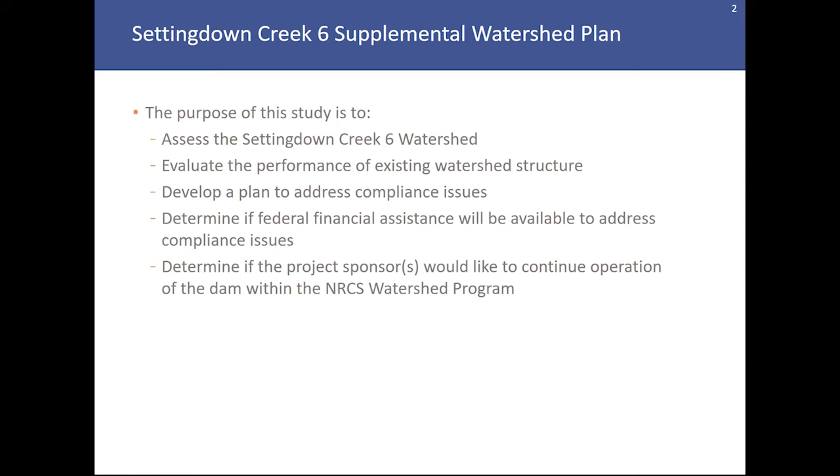The purpose of the planning study is to assess the Settingdown Creek 6 watershed, evaluate the performance of the existing watershed structure, develop a plan to address compliance issues, determine if federal financial assistance will be available to address those compliance issues, and to determine if the project sponsors would like to continue operation of the dam within the NRCS watershed program.

As part of the planning study, public participation is of great importance. The objective of the public participation plan is to inform the public and watershed stakeholders of the planning effort. A series of public meetings have been held for Settingdown 6.

The first and second public meetings included a brief history of the NRCS watershed program, a brief history of dam safety, considerations for dam design, operation, and maintenance, an overview of the Settingdown Creek watershed and the specific dams that have been included in the planning study, and also an opportunity for the public and other stakeholders to submit questions and comments regarding scoping topics and the identification of project opportunities and concerns. The second public meeting included a list of potential rehabilitation alternatives for the dam.

The first public meeting was posted to Schnabel's YouTube channel from August 7th to August 17th, 2020, and the second public meeting was posted to Schnabel's YouTube channel from December 18th, 2020 until January 4th, 2021. Please note that the first and second public meeting presentations for Settingdown 6 have been reposted to Schnabel's YouTube channel for those who were unable to view the presentations during the allotted date ranges listed above, in the event that they would like to review those presentations with this third presentation.

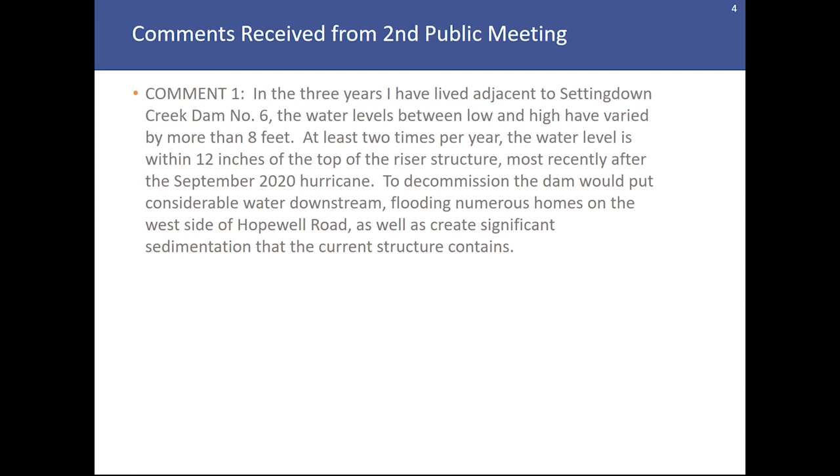After the second public meeting, a series of comments were received. We'll take this time during this presentation to present those comments that were received. Comment 1. In the 3 years I have lived adjacent to Settingdown Creek Dam Number 6, the water levels between low and high have varied by more than 8 feet. At least 2 times per year, the water level is within 12 inches of the top of the riser structure, most recently after the September 2020 hurricane. To decommission the dam would put considerable water downstream, flooding numerous homes on the west side of Hopewell Road, as well as create significant sedimentation that the current structure contains.

Comment 2. Settingdown Creek Dam Number 6 is home to fish, egret, herons, ducks, geese, and a multitude of additional aquatic wildlife. It is also adjacent to wetlands that further protect the wildlife from human intrusion. Dam decommissioning would eliminate this wildlife, in addition to causing flooding across Settingdown Creek Road.

Comment 3. The no action option is the least expensive and least wildlife intrusive option. The existing dam structure is functioning properly for flood control and sedimentation collection. The dam decommission option creates more flooding and sedimentation issues downstream while having the greatest impact on wildlife. It may solve 500-year flood concerns with the dam, but creates new issues that would require home destruction and removal to remediate human flood threat downstream caused by the dam removal.

Dam decommissioning negatively affects both wildlife and humans and should not be considered an option. Both of the spillway options are possible, but would take years to accomplish and be expensive. As a landowner of a portion of the lake, I would ask that the property owners be considered for the reduction of their home/land values in any option chosen.

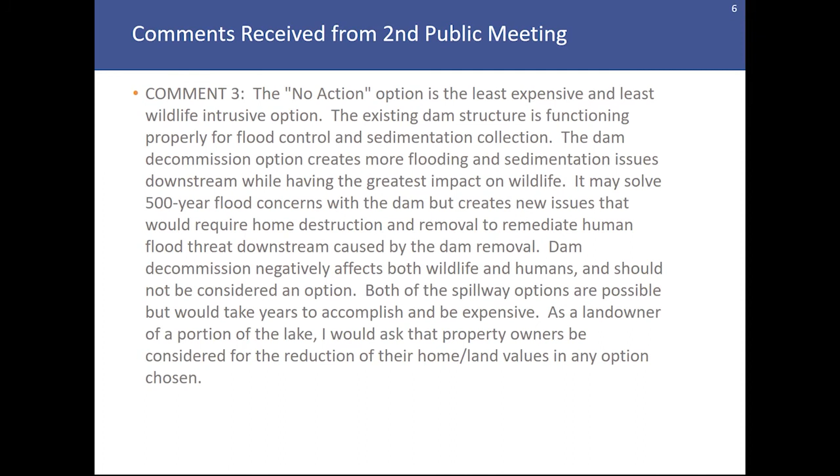The third public meeting presentation will discuss the following topics. A review of the Settingdown Creek watershed and the specific dams that are included in the planning study. A review of the existing conditions associated with Settingdown 6, and the presentation of the shortlisted alternatives to address concerns with the dam. These will include a no action alternative, which would be a future without federal investment alternative, meaning that the project sponsor would be responsible for funds to address concerns or issues with the dam. There would be no federal funding with that option.

A future with federal investment alternative will be discussed, as well as a decommissioning option that is required as part of the planning process to be considered. The locally preferred alternative, based on conversations with the project sponsors and NRCS, will be presented, and there will be an opportunity to submit questions and comments at the end of the presentation.

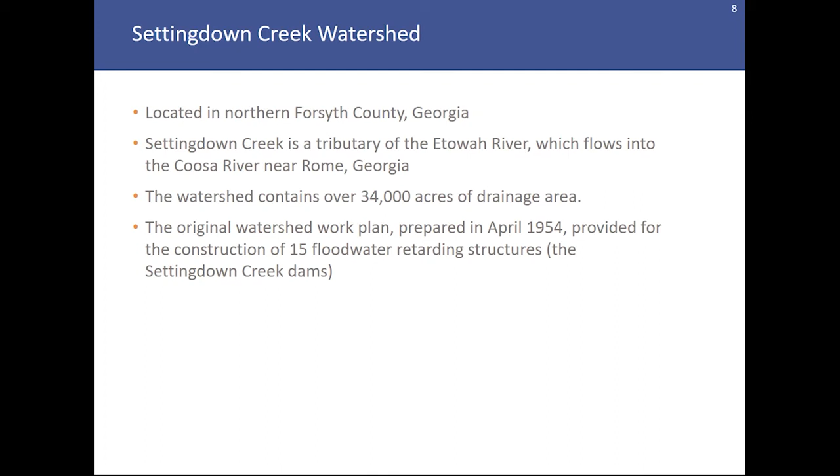The Settingdown Creek watershed is located in northern Forsyth County, Georgia. The creek is a tributary of the Etowah River, which flows into the Coosa River near Rome, Georgia. The watershed contains over 34,000 acres of drainage area. And the original watershed work plan, which was prepared in the early 1950s, provided for the construction of 15 floodwater retarding structures, which are known as the Settingdown Creek dams.

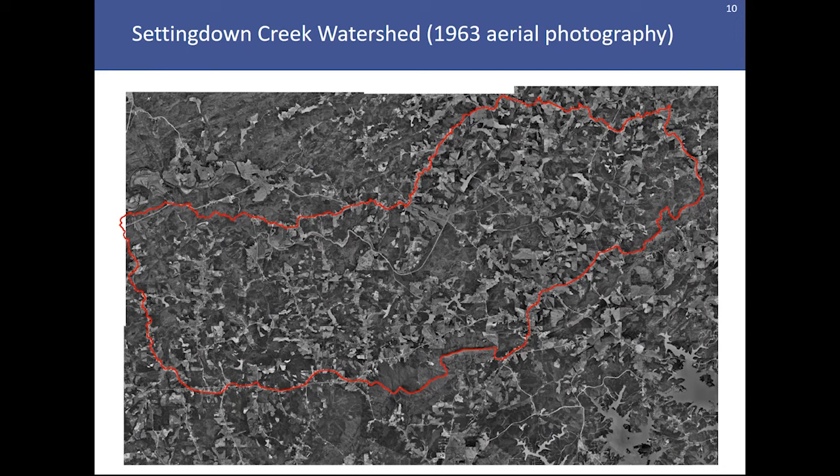This slide presents the same delineation of the watershed overlain on aerial photography from the early 1960s. This would have been the condition of the watershed shortly after the dams were constructed along Settingdown Creek.

As part of the preparation of the supplemental watershed plan, there were several focal points of analysis and study. These included consideration of upstream areas with regard to flooding and the need for additional storage capacity in the lakes, downstream areas with regard to flooding and potential breach zones were the dam to fail in a catastrophic manner, evaluation of the hydraulic capacity of the existing spillway outlet works, how the dam and spillway systems perform during specific storm events, an analysis of the economic and social benefits provided by the dam, as well as an assessment of the environmental and cultural resources located within the vicinity of the dam.

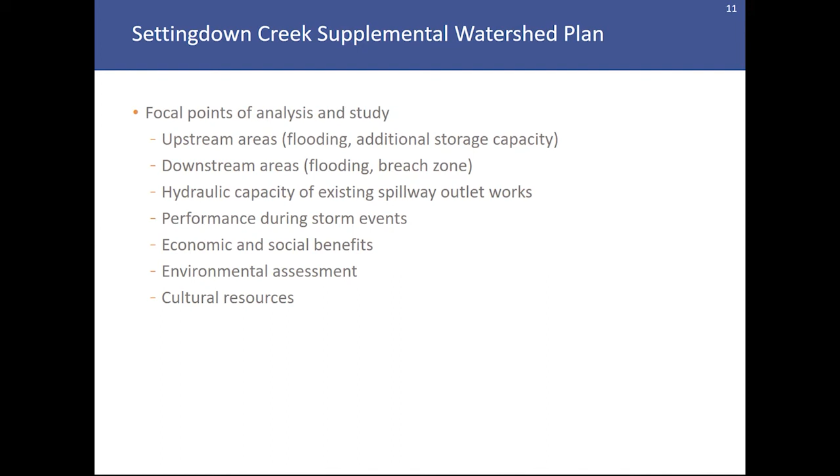Settingdown 6 is a dam that meets Georgia Safe Dams program criteria to be considered a Category 1 or high hazard potential dam. This means that failure or improper operation of the dam would likely result in the loss of human life. The dam requires an operating permit from the Safe Dams program. Prior assessments of the dam indicated that the dam does not comply with current SDP rules and requirements. The dam is not exempt from SDP rules and requirements.

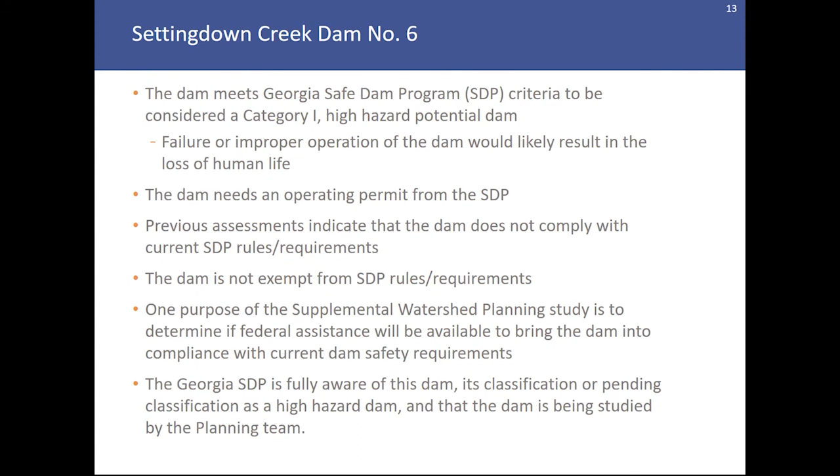One purpose of the Supplemental Watershed Planning Study is to determine if federal assistance will be available to bring the dam into compliance with current dam safety requirements. And the Georgia Safe Dam Program is aware of this dam, its classification or pending classification as a high hazard dam, and that the dam is being studied by the planning team.

Original design features of the dam include that it was not originally designed as a high hazard dam. The purpose of the dam is flood mitigation, and an anticipated secondary purpose is sediment accumulation and storage. The dam has a reinforced concrete principal spillway riser structure and nearly horizontal pipe or conduit that conveys water from the lake on the upstream side of the dam to the outlet channel at the downstream side of the dam. The dam also has a vegetated earthen auxiliary or emergency spillway constructed in the right abutment of the dam in order to pass flows associated with low frequency, high intensity storm events.

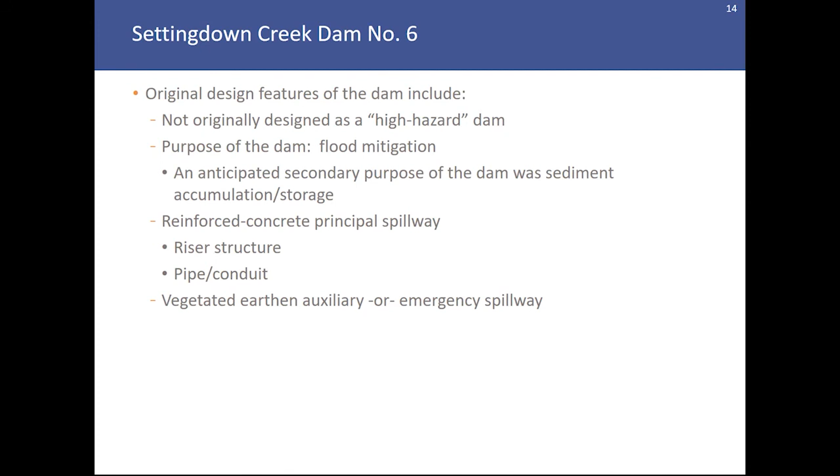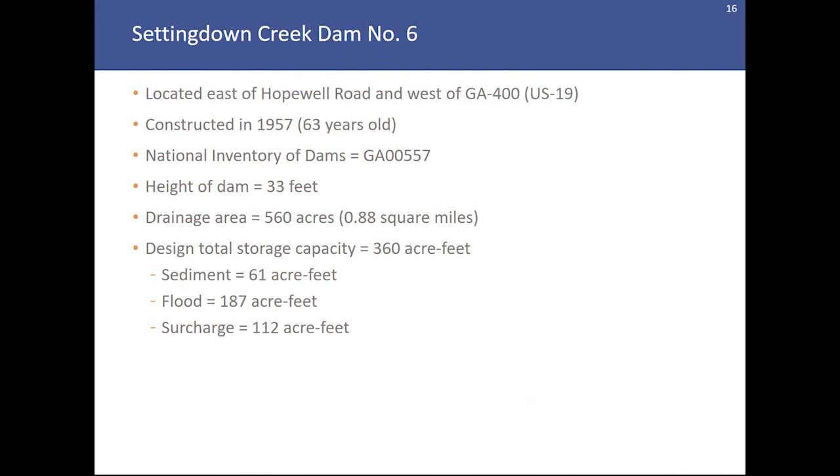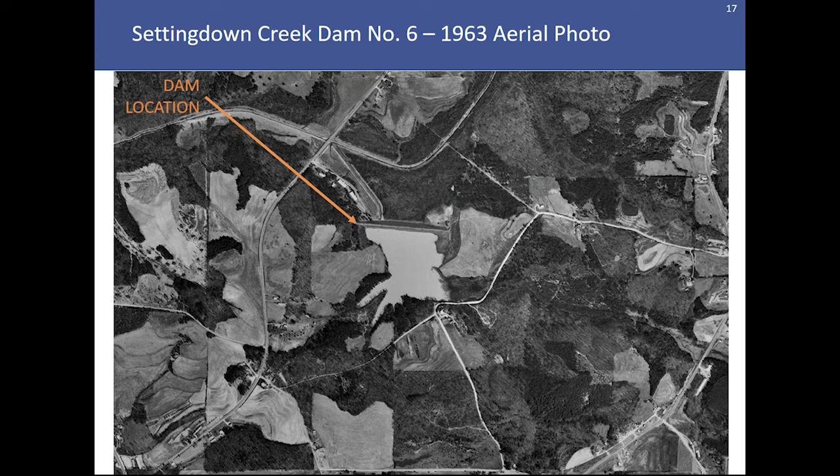This slide shows the location of the dam on a 1963 aerial photo. Please note the land uses around the dam shortly after it was constructed in comparison with more recent aerial photography noting the location of the dam. Obviously, there's been some development in the vicinity of the dam along Georgia 400 and in downstream areas.

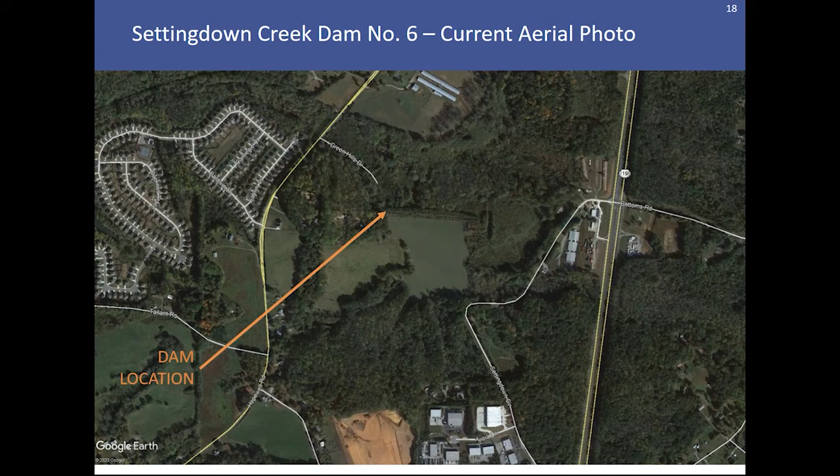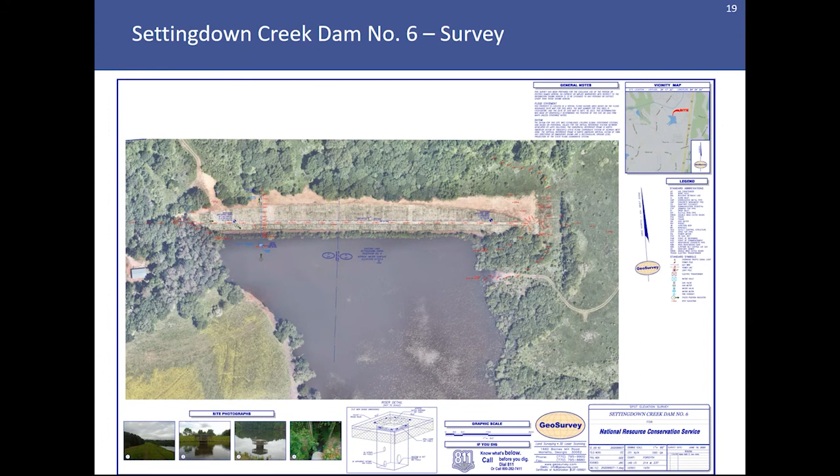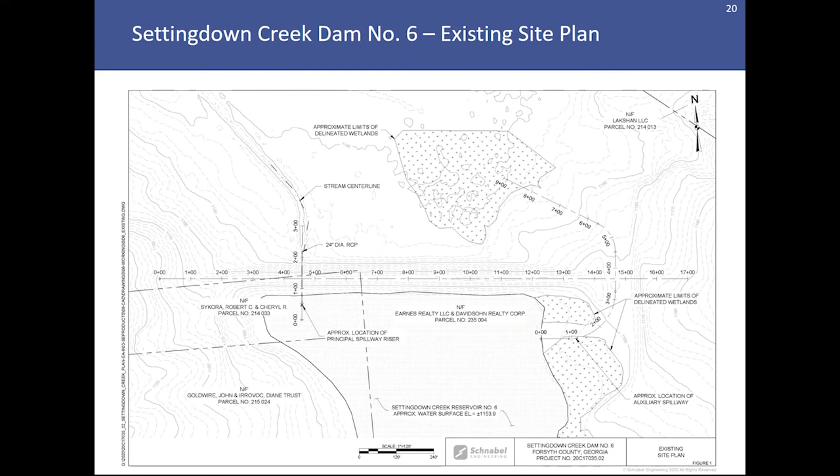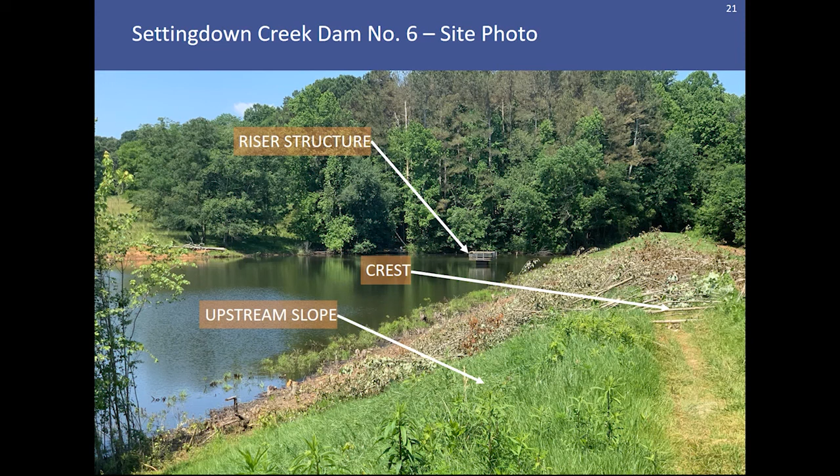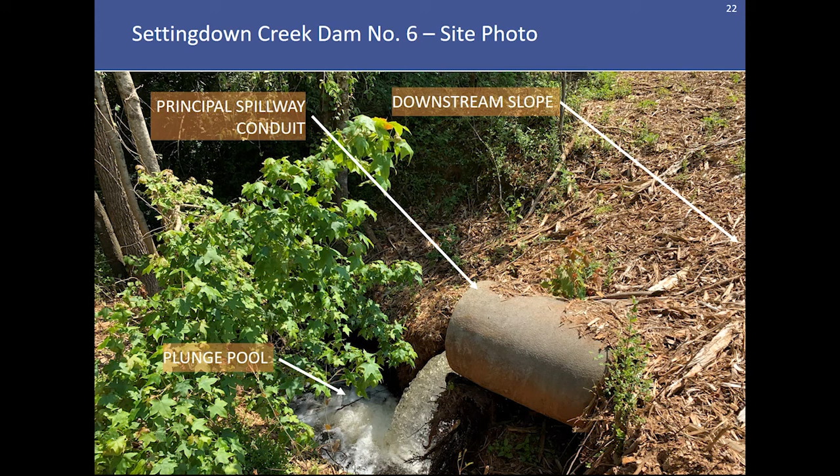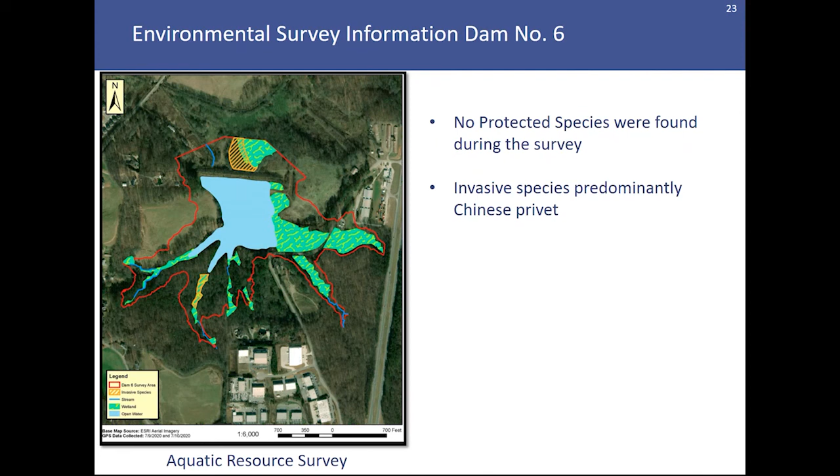An environmental survey was performed to support the environmental assessment efforts for this dam. The aquatic resource survey, shown at the left-hand side of this slide, indicates the survey area of the environmental survey, the location of invasive species, which have primarily and predominantly been identified as Chinese privet, as well as the locations of streams, wetlands, and open water within the project survey area. No protected species were found during the survey.

The dam, being older than 50 years, is eligible for consideration on the National Register of Historic Places, but its placement on the register is not recommended. The dam is old, however, it is not unique, and there are no exceptional feats of engineering associated with it that would give it credence to be included on the registry, in the opinion of the cultural resources team.

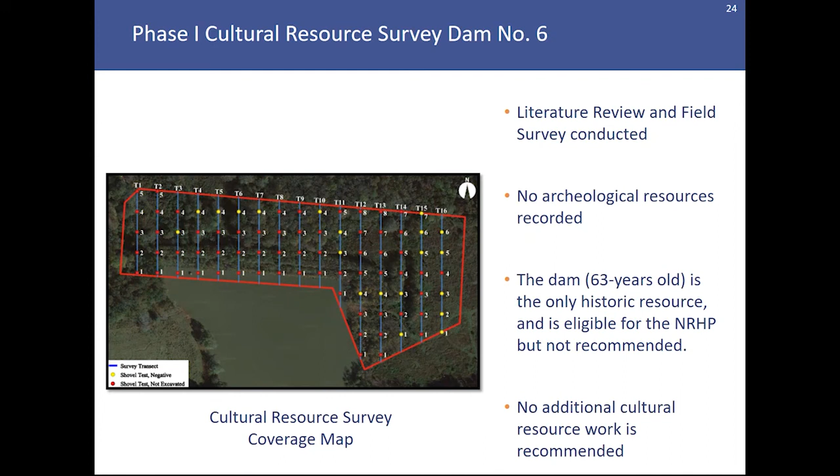There are hundreds of dams, such as Settingdown Creek 6, located in Georgia and across the country, but that doesn't necessarily mean that their historicity is unique or merits eligibility for the registry.

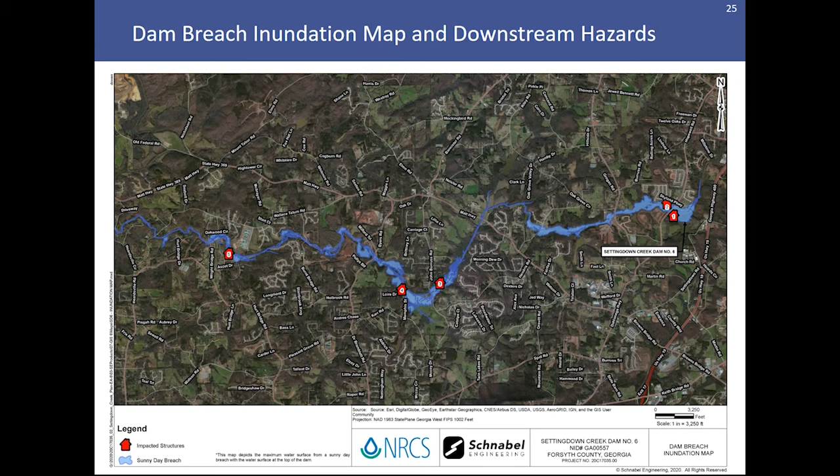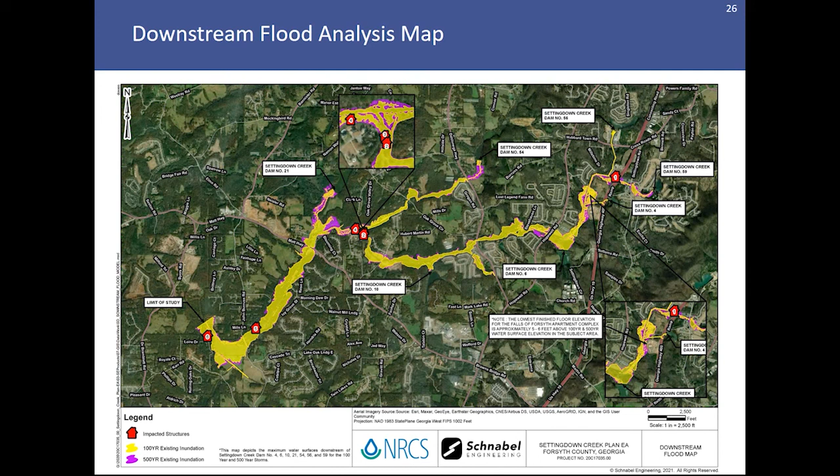Additionally, the extents of the 100-year and 500-year storms are shown in red and orange respectively, and the maximum water surface elevations associated with the Georgia Safe Dam Program design storm and the NRCS freeboard hydrograph storm, which is 100% of the PMP, are also indicated.

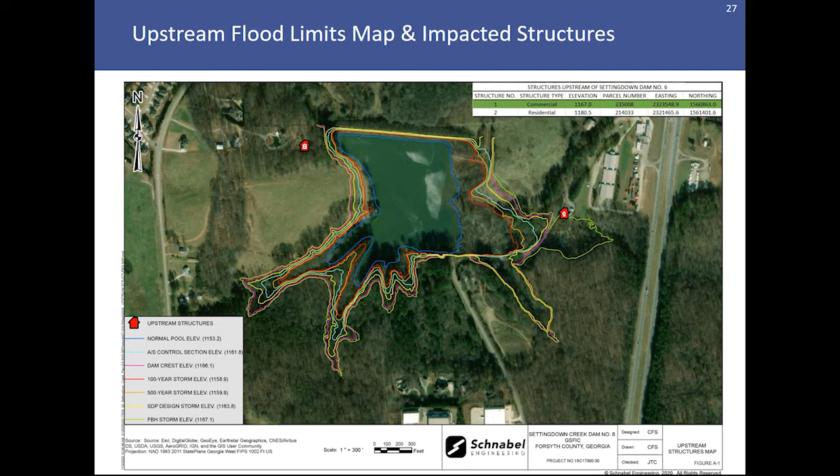As you can see, there are no structures of consequence that are flooded by the 100-year or 500-year storm. However, a commercial interest, apparently a cell phone tower foundation, would have a limited amount on the order of 1/10 of a foot of water inundating it in the event of the NRCS freeboard hydrograph storm event, which is on the order of 30 to 32 inches of rain in 6 hours.

A review of existing deficiencies with the dam. As noted previously, previous dam assessments and studies indicated that the dam and spillway system may not be capable of passing Georgia Safe Dam Program criteria. So just keep that in mind as we go through this list of deficiencies.

The dam was recently cleared during the summer of 2020. An underwater inspection of the riser structure concluded that portions of the slide gate assembly are worn and or covered in marine growth, so some attention may be needed to improve the condition of the slide gate. The gate is covered by accumulated sediment, and portions of the concrete on the riser structure are cracked or spalled and may need some attention.

A closed circuit television inspection of the interior of the principal spillway conduit was performed and reviewed by the planning team. The interior of the pipe and joints are in acceptable condition.

Updated modeling for the dam indicates that the dam in its current state is capable of safely storing and passing the Safe Dams Program design storm event with adequate freeboard. This design storm event is 1/3 of the probable maximum precipitation and would be on the order of 10 to 11 inches of rain over a 6-hour period.

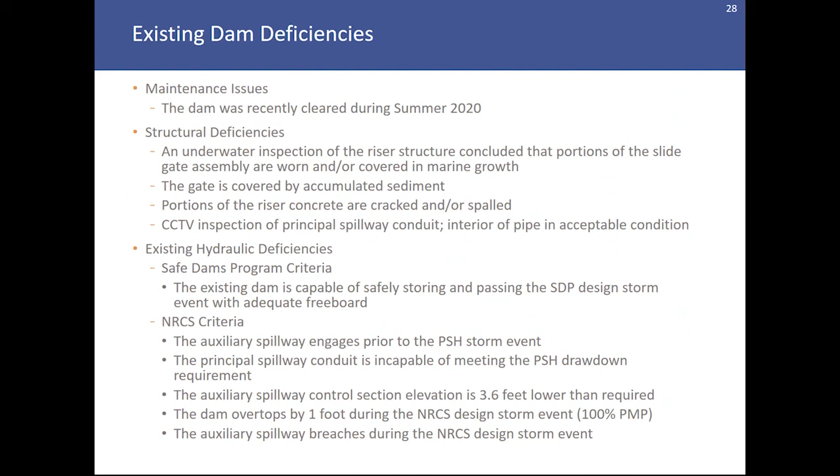As a result of some of the noted deficiencies or maintenance items that need to be addressed, 3 levels of rehabilitation alternatives have been shortlisted for this dam.

The first would be a no action alternative. This assumes that the dam would be rehabilitated or improved to meet Georgia Safe Dam Program criteria for a high hazard dam, and that no federal funding would be available or necessary to meet these criteria.

The no action alternative could consist of a permanent breach of the dam or rehabilitation to state criteria. This would be based on which of the 2 options, either the breaching or the state rehabilitation, are more cost effective to the project sponsors.

A decommissioning alternative is required to be considered as part of the planning process. This would be removal of the entire earthen embankment and stabilization of the lake and channel through the dam. It also requires consideration of increased flooding to downstream interests.

The final alternative that will be discussed today is the future with federal investment alternative, which would be a full NRCS rehabilitation to meet criteria outlined by NRCS regulations and guidelines. This would involve improvements to the embankment, improvements involving removal and replacement of the principal spillway, and likely the decommissioning of the earthen auxiliary spillway and construction of a structural spillway to pass the larger storm events.

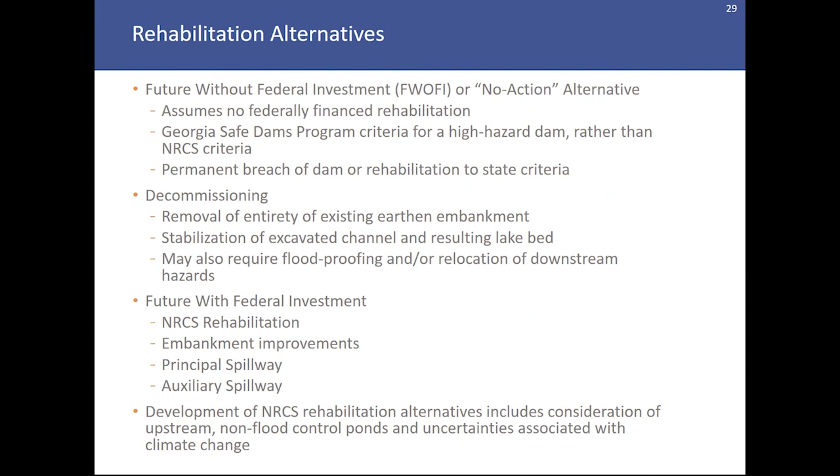The no action alternative for this dam would involve generally maintenance items. This would include leveling the crest of the dam to a consistent elevation where there are low spots and regrading the upstream and downstream slopes to 3-to-1 in areas where the slope is steeper. It would also involve the construction of a riprap lined wave berm along the upstream shoreline to protect against wave erosion in the lake.

The principal spillway rehabilitation would involve design and construction of a riprap lined plunge pool at the downstream end of the conduit. For lack of a better term, refreshing the existing plunge pool and confirming that the dimensions are adequate for flows from the pipe.

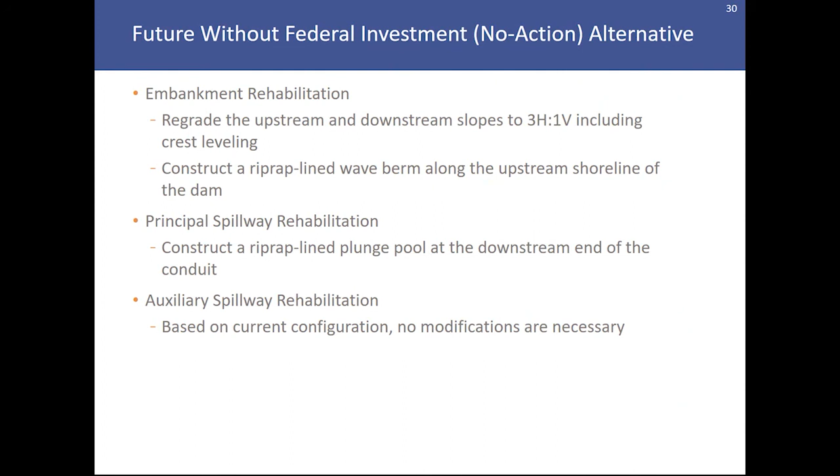Based on the current configuration of the auxiliary spillway, there are no structural measures needed to address any concerns with the auxiliary spillway. There are some obstructions in the form of woody vegetation in the inlet channel that the project or planning team would recommend being removed.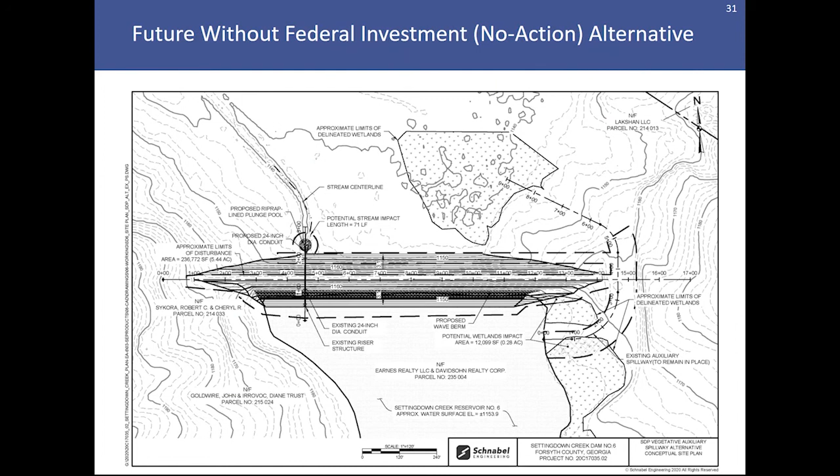At the right end of the dam, where the auxiliary spillway is located, the auxiliary spillway inlet channel for the width of the spillway is recommended to be cleared of obstructions so that in the event storms increase water levels in the lake, flows can make their way into the inlet channel and over the control section without obstruction.

In general, the crest of the dam does not need to be raised. However, there are some irregularities in the crest elevation that we would recommend be smoothed out to provide a uniform crest elevation across the dam.

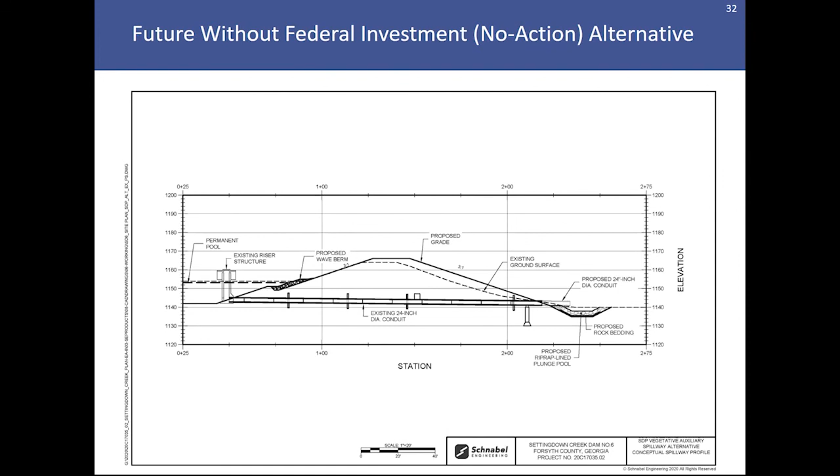The decommissioning alternative was also considered as part of the planning process. This would involve permanently draining the lake by removing the entire dam and reconnecting the original floodplain beneath the dam footprint. This would also involve stabilization of the lake bed with permanent vegetation and stabilization of the primary channel through the footprint of the old dam with riprap.

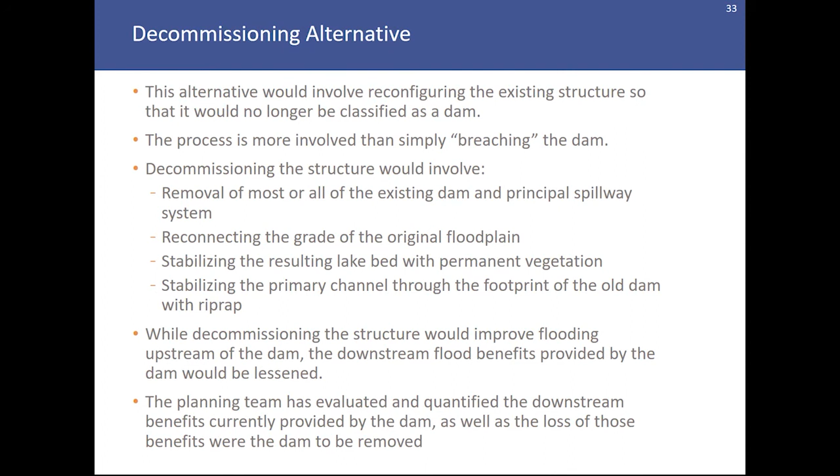While decommissioning of the structure would improve flooding upstream of the dam, the downstream flood benefits would be lessened. The planning team has also evaluated and quantified the downstream benefits currently provided by the dam, as well as the loss of those benefits if the dam were to be removed.

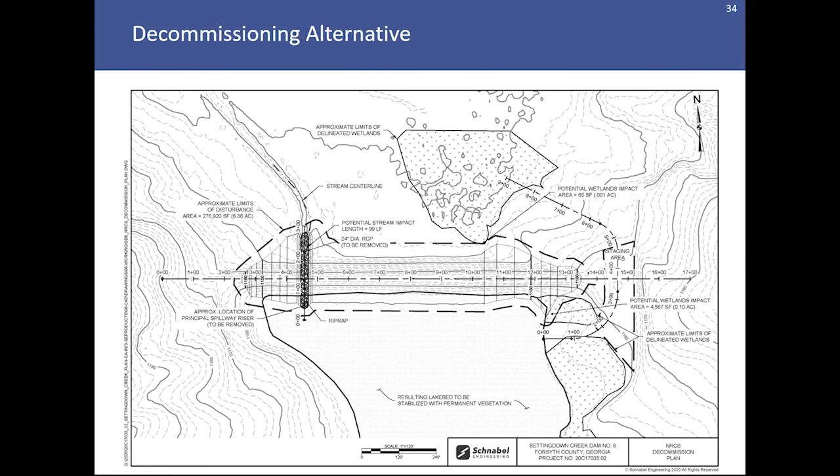Here's a site plan that indicates the effort to remove the existing dam. Contour lines are shown at the left and right ends of the dam, and in between those contour lines, the material that creates the embankment would be removed. The floodplain would be reconnected to the original line and grade prior to construction of the dam, and the channel where the principal spillway existed would be lined with riprap, since that would be the primary location of flow permanently. The lake would no longer impound a permanent pool and would be stabilized with permanent vegetation, likely reverting to a wetland area in this scenario.

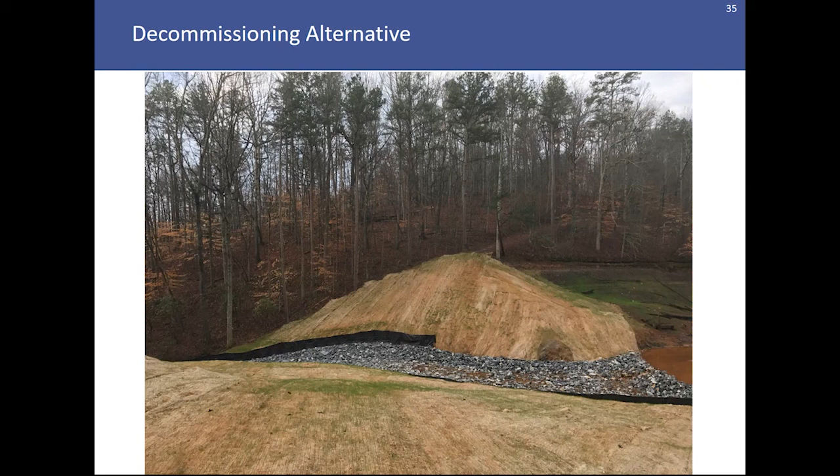Here are a couple of photographs of what a decommissioning alternative would look like. As you can see, the main portion of the embankment has been removed. The excavation slope has been laid back to a manageable slope on the order of 3:1 and revegetated. These photos also indicate the location of stone armoring through the primary flow channel that would result after the dam is removed.

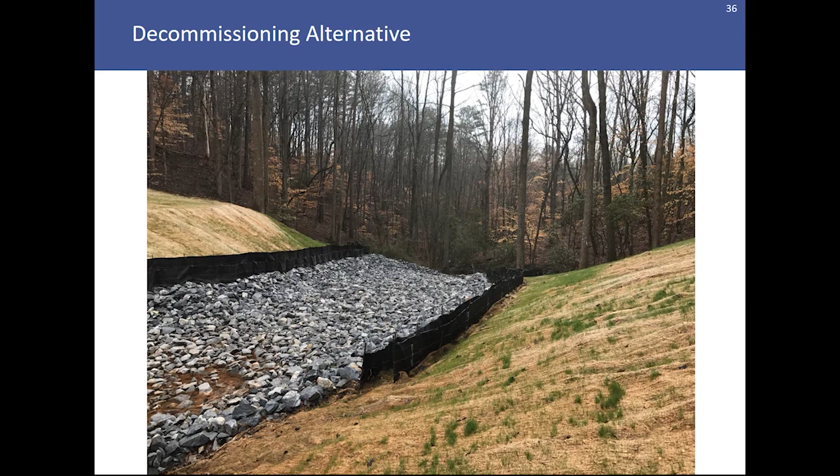The final alternative we'll discuss in this third public meeting is the future with federal investment alternative, which would involve full rehabilitation of the dam to meet NRCS standards. This would involve raising the crest of the dam to the current maximum water surface elevation associated with the design storm event, regrading the upstream and downstream slopes, constructing the riprap-lined wave berm, and decommissioning or closing off the existing auxiliary spillway that is not capable of passing 100% of the PMP without breaching.

The principal spillway would be removed and replaced with a new riser structure. The existing conduit could be reutilized but would require extension, and a plunge pool would also be constructed just beyond the location of the existing discharge point of the pipe.

A relatively large structural spillway would be required for this dam to allow it to pass the design storm event. The planning team is proposing a broad-crested roller compacted concrete stepped spillway to perform this function. The spillway would be on the order of 160 feet wide, with a step height of 1 foot.

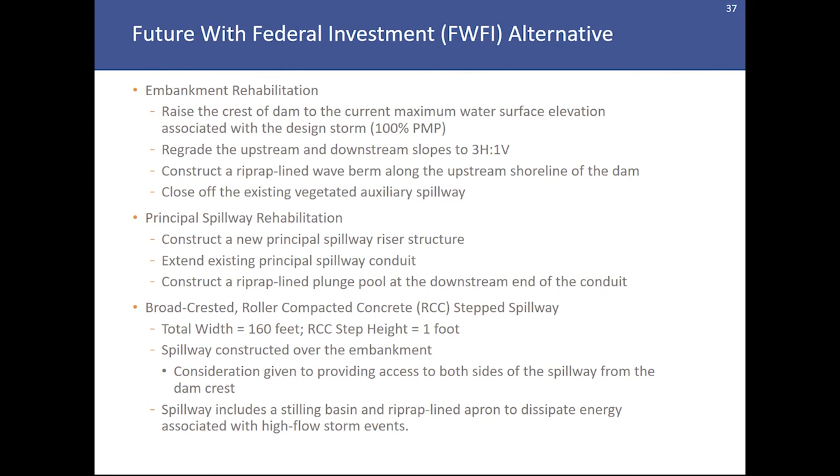The spillway could be constructed over the earthen embankment, with consideration given to providing access to both sides of the dam and spillway from the dam crest. It would include reinforced concrete sidewalls and a stilling basin and riprap-lined apron at the downstream toe to dissipate energy associated with high flow storm events.

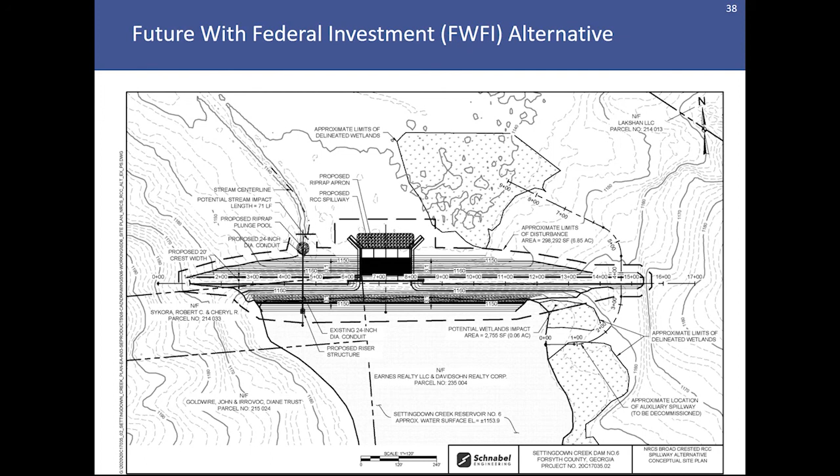The spillway would be stepped on a 3:1 slope down to the base of the dam or floodplain area, and flows over the steps would discharge onto the riprap apron - the RCC spillway, stilling basin, and riprap apron.

Here's a profile view of what the stepped spillway would look like. You can see the top of the proposed sidewalls, the location of the steps, the location of the wave berm upstream of the spillway, and the location of the riprap apron downstream of the spillway.

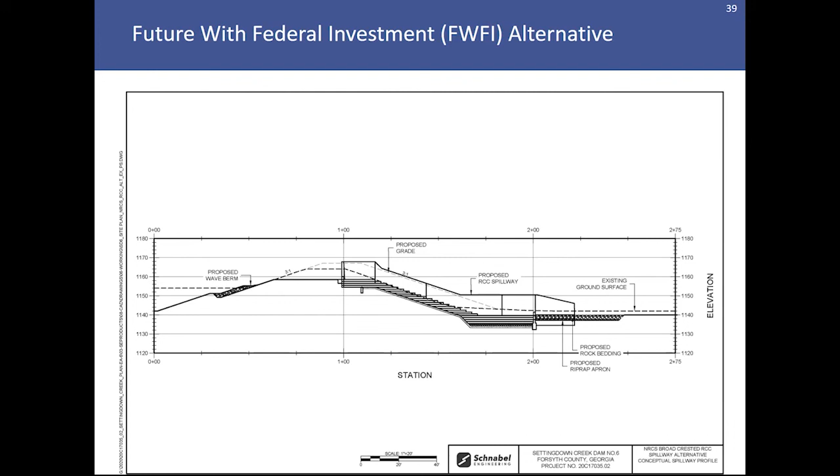We've provided a couple of photos with examples of what these RCC spillways would look like. You can see in this photo that there's an opportunity in some cases to cover portions of the RCC with soil and grass after construction.

These spillways would not flow on a regular basis. They would only engage during relatively infrequent storm events, on the order of the 100-year and 500-year storm event.

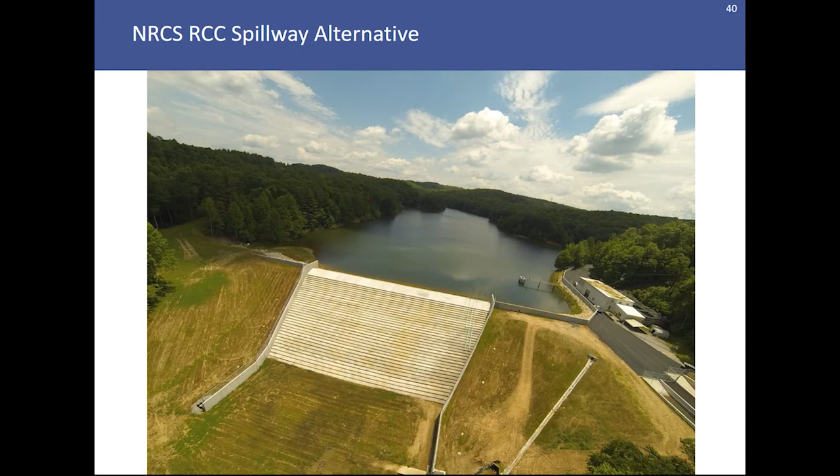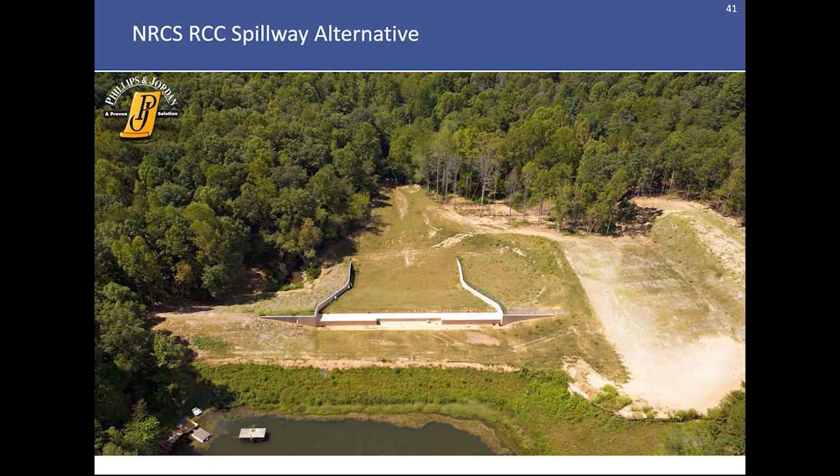Here's another example of an RCC spillway where the steps have also been covered with soil and grass, since those spillways, as discussed previously, will not flow on a regular basis.

And here's one more option, or view. This photograph would most likely be the most similar to the option that would be required for Settingdown 6.

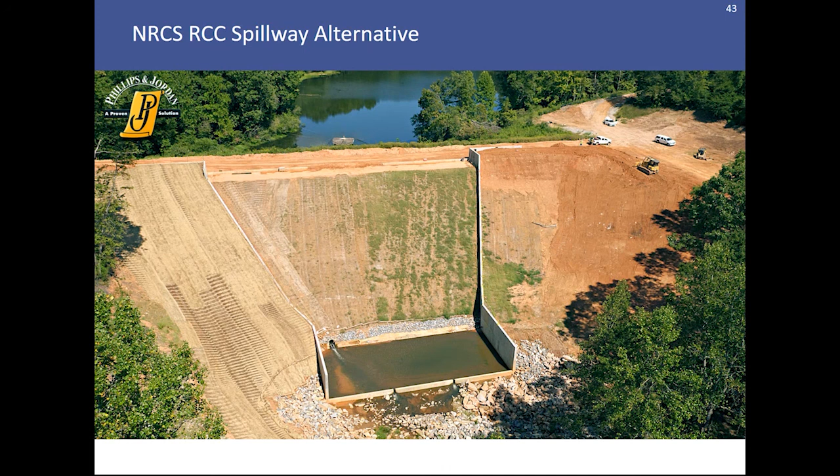As a result of the planning study and discussions with the project sponsors and representatives of the NRCS, the planning team is putting forward the locally preferred alternative for this dam as the future without federal investment, or no action alternative, for the dam.

The dam currently meets hydraulic requirements for the Georgia Safe Dams program, and it is recommended that some maintenance issues be addressed and improved for the dam.

That includes leveling the crest, regrading the slopes to a uniform 3-to-1, installing the riprap lined wave berm along the upstream shoreline to help with wave erosion, extending the principal spillway conduit slightly downstream, and constructing a riprap lined plunge pool at the downstream end - with no structural modifications to the auxiliary spillway. We do recommend that the inlet channel of the spillway be cleared of vegetative obstructions so that flows can enter the auxiliary spillway without obstruction.